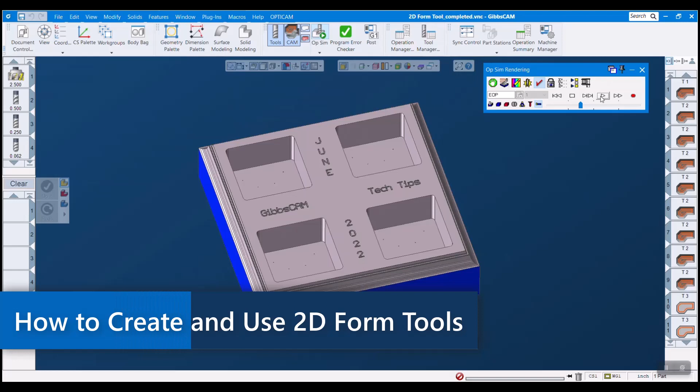Form tools are sometimes a necessary part of programming when you are using unconventional tools. Recent enhancements made to GibbsCAM make creating, using, and simulating these tools better than ever. Today, I'm going to show you how to import a DXF, make a 2D form tool from it, and use it in a contour operation.

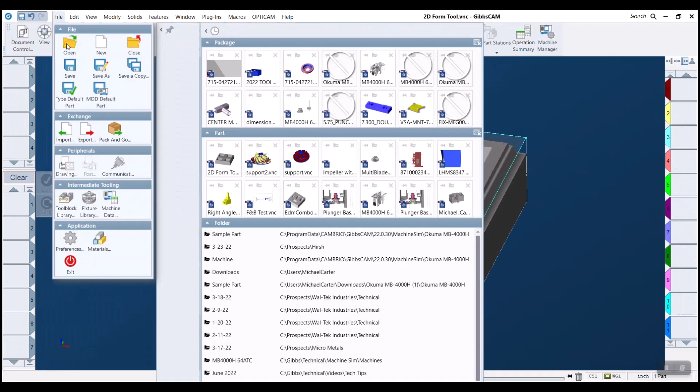So the first thing we want to do is go to File, Import. I want to select my DXF. DXFs are drawing file formats that only use two dimensions, X and Y. You can typically download these from the manufacturer's website for precisely this reason.

And so once I import this here, it actually comes in gray. And the reason for that is it's making a work group for our DXF layer. You can see that when I open my work group menu here, and when I select a DXF work group, it turns blue here, right?

So there are three rules that your tool geometry needs to follow for 2D form tool creation to work. The first rule is that it needs to be in the XY plane. I think when you import things from drawing files, they typically come in the XY plane, so this isn't too much of an issue. However, it is still necessary for this to work.

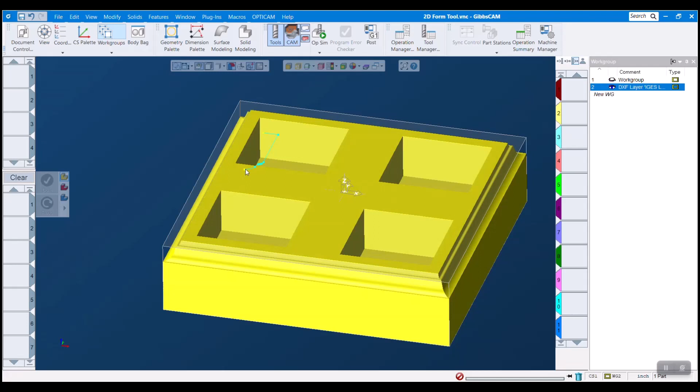The second rule is the tip of our tool here must be at 0, 0, 0 of our original coordinate system. So how we do that is we just double click this to chain select it, and we can go to Modify, Absolute Translate, and I'm going to click in here and I'm going to hold down Alt and Shift on my keyboard. So when I do that, it turns to a square, and what we're doing is we're grabbing values from the model to put into this dialog box.

So Alt and Shift on the tip of our tool, and it fills in the XYZ coordinates of our tool, right? And I want to move it to 0, 0, 0. So I hit do it, and we see that it jumps right over. So now I still have my tool highlighted, my geometry highlighted rather.

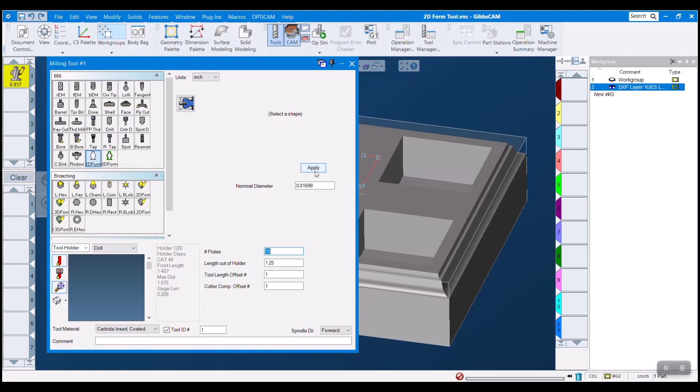We can double click on a blank tool tile, and 2D form tool is down here at the bottom. And then I want to come over here and hit apply, and you'll see it load in here, not only up here, but down here. We can select a holder. We can tell it how far out of the holder it is, all the things we can do with normal tools. So that's all standard behavior. So that's how we create our 2D form tool.

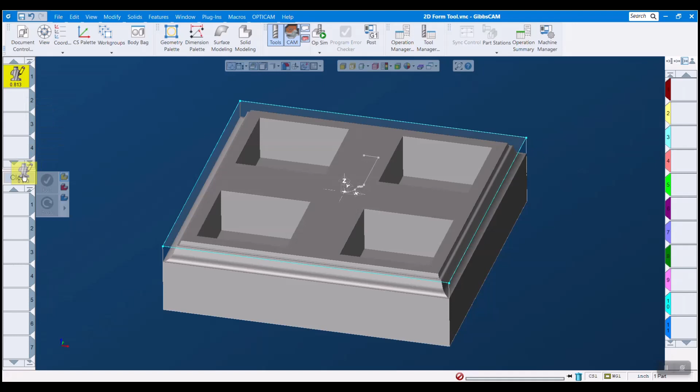Let's make a quick operation with it. So I'm going to jump off of that work group here back to our original work group and close out that menu. Let's drag this down and make a contour. And I'm not going to dwell too much on this. I just want you to see our tool in action.

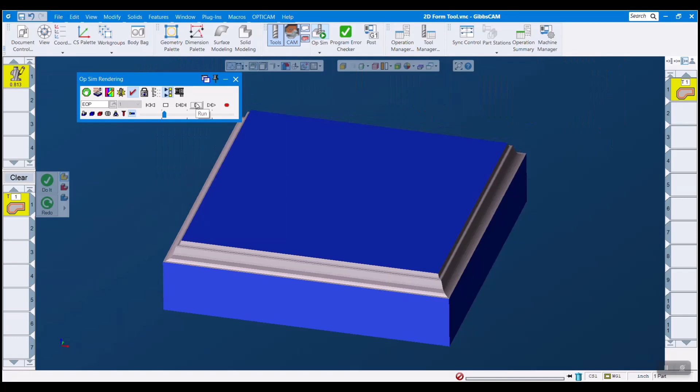Start off our part. So recent enhancements to simulation allow GibbsCAM to accurately simulate all kinds of form tools now, even in multitask machining and 5-axis machining environments. So that really takes our form tools up a notch here in terms of usability, viability.

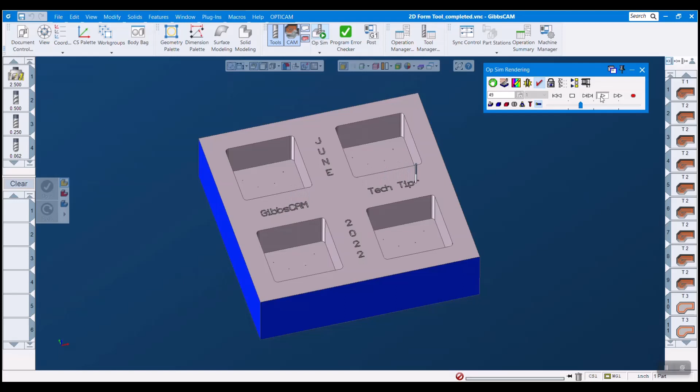2D form tools can sometimes be powerful allies when trying to machine difficult features. Now that simulation of these tools has been enhanced, using these is an integral part of many programmers' routines. I hope that this tech tip has helped you see that form tool creation can be quick and easy, and that it is not something that needs to be shied away from.